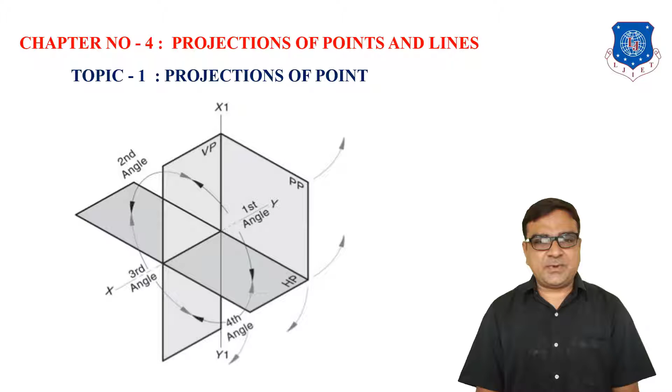When the object is projected on the vertical plane, when you're looking from front, that projection is known as front view. When we observe from top, the projection obtained on horizontal plane is known as top view. And when we observe from any side and the projection of the object is obtained on profile plane, that is known as side view. So we are starting orthographic projections, in particular of a point.

As is shown in figure, this is a quadrant system. We have four quadrants by using two horizontal planes and two vertical planes. When you look at the planes from this arrow, the space which is above HP and in front of VP is known as first quadrant. The space which is behind VP and above HP is second quadrant. The space which is below HP and behind VP, third quadrant. And the space which is below HP and in front of VP is known as fourth quadrant.

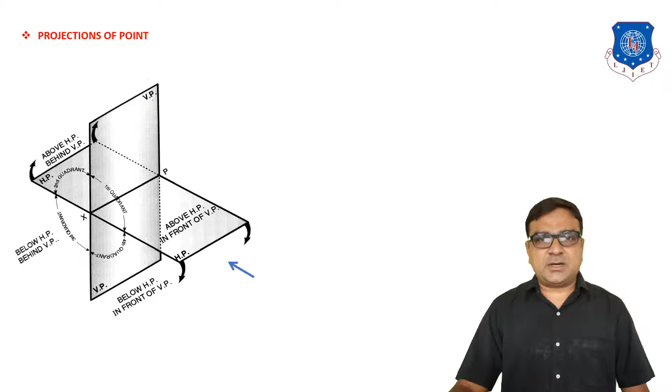Now for taking the projection of point, first of all, we have to select the location of the point. There are 9 possibilities for the point in these 4 quadrants. So let us see location of points. When the point is in first quadrant, its address is above HP and in front of VP. Second quadrant, above HP behind VP; third quadrant, below HP behind VP; fourth quadrant, below HP in front of VP. These are the 4 quadrants where the point is in space.

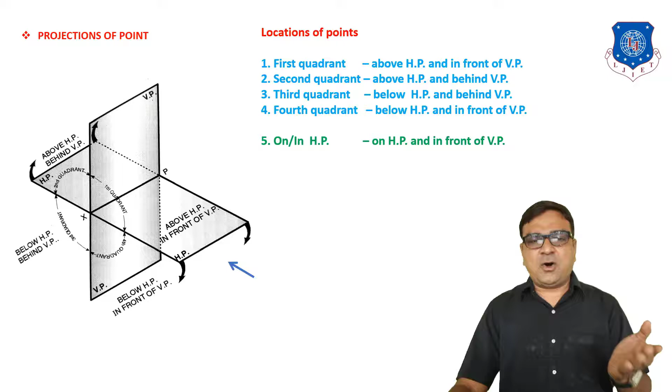But when the point is exactly on horizontal plane, there are 2 possibilities: either in front of VP or behind VP. If the point is on HP and in front of VP, our point is in horizontal plane in front of VP. Second, on HP and behind VP. Third one is on VP above HP, and on VP below HP. So there are another 4 possibilities.

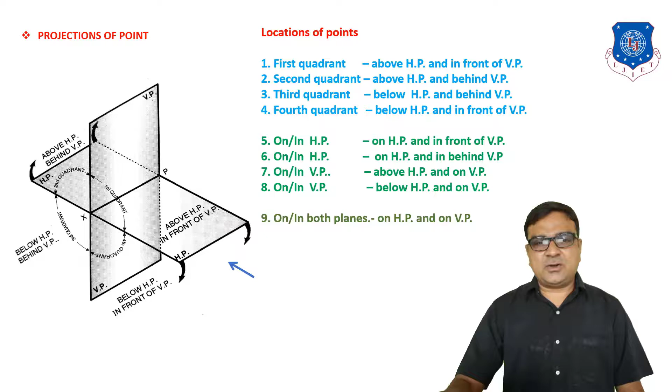And last, when the point is exactly on HP and on VP, the point is on the intersection of horizontal plane and vertical plane. That line is denoted by XY. Now let us see one by one the exact projection of the point when the point is in different locations. Our first case, when point is above HP and in front of VP.

In this object, you can see one horizontal plane and one vertical plane, both intersecting perpendicular to each other, and our point A, which is located in first quadrant, meaning it is above HP and in front of VP. The distance from HP is denoted by small h, and the distance from vertical plane is denoted by V. There are two different locations for the view position of the observer.

When you observe from front, the projection of A obtained on vertical plane is denoted by a dash. This projection line is always perpendicular to vertical plane. And when you're looking from top, the projection of A obtained on horizontal plane is denoted by small a.

After taking the projections, when you rotate the horizontal plane clockwise, you will get the projections which are shown here. This is horizontal plane and vertical plane, with XY between them. The position of VP is as it is, but the horizontal plane, by moving clockwise 90 degrees, looks here like this.

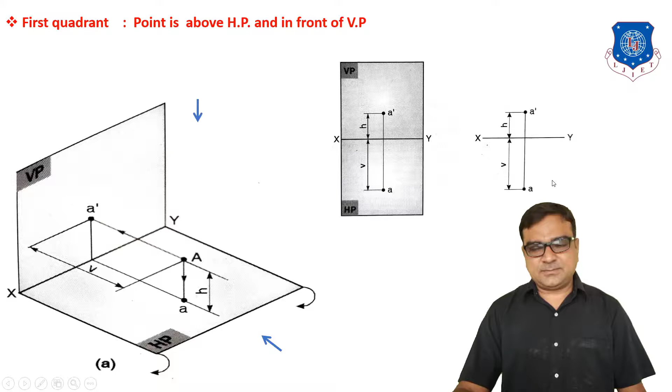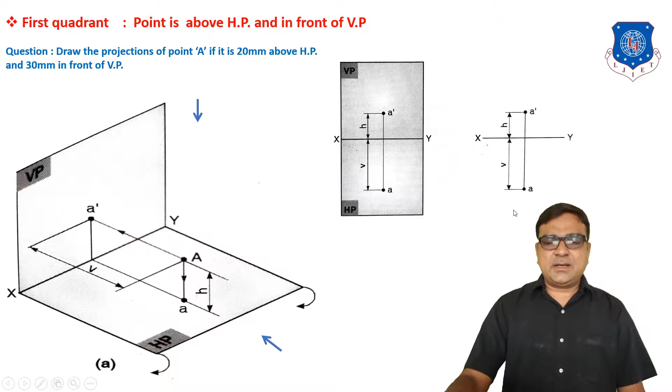Question: draw the projection of point A if it is 20 mm above HP and 30 mm in front of VP. So for this particular question, in our answer, the value of H is equal to 20 mm and the value of V is equal to 30 mm. So similarly, we can observe here the animation of point A: when you're looking from here, the projection of A on the vertical plane is A dash, and from top, the projection of A on the horizontal plane is small a.

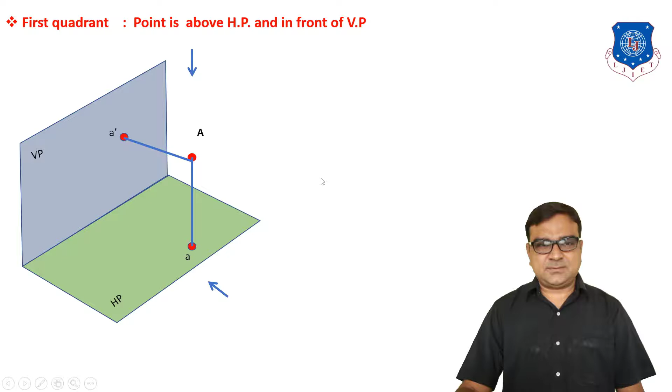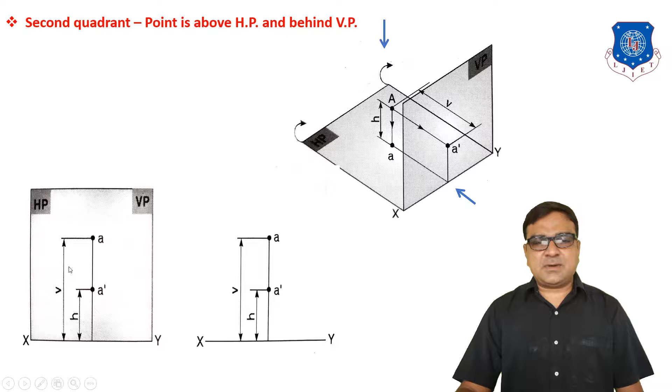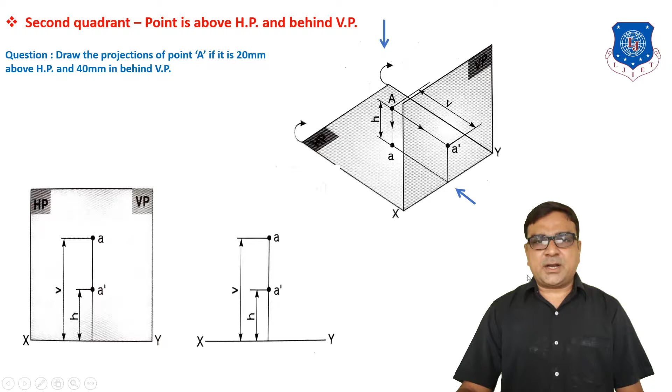Here XY, above XY A dash at H distance and above XY the top view small a at V distance. Generally it is denoted by this drawing. Question: draw the projection of a point when it is 20 mm above HP and 40 mm behind VP. So our answer is here, in which the value of H is 20 mm and the value of V is equal to 40 mm.

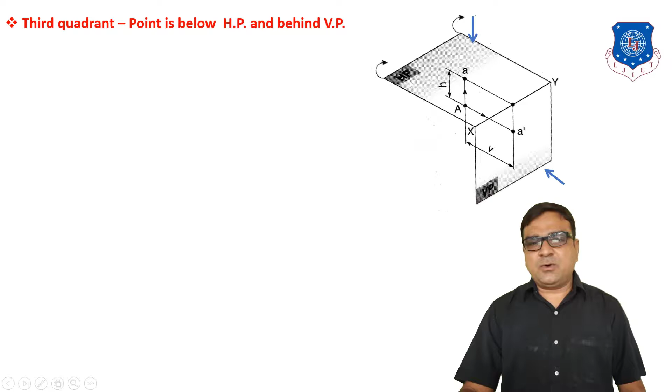Now the third quadrant. So the point is below HP and behind VP. Look at this figure, where our point A is in the third quadrant, meaning below HP and behind VP. When you observe from here, the projection of A on the vertical plane is denoted by A dash, and when you observe from top, the projection of A is denoted by small a. Now to draw in a single plane, we always have to move the horizontal plane clockwise 90 degrees. We do not move the vertical plane. After revolving HP 90 degrees clockwise, our projection looks like this.

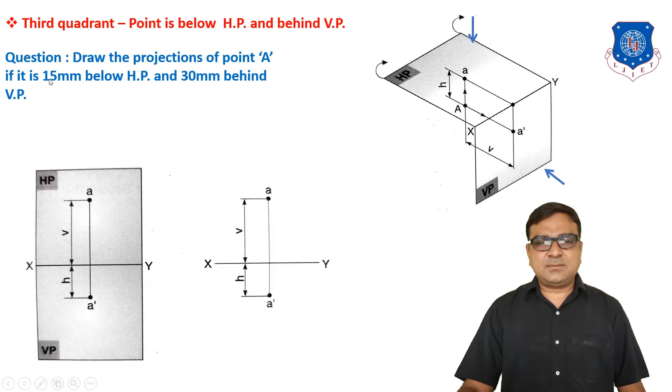XY, A dash is below XY at H distance, and small a, the top view, is above XY at V distance. Generally, it is represented like this. If your question is like this: draw a projection of point A if it is 15 mm below HP and 30 mm behind VP, then the value of small h is 15 mm and the value of V is equal to 30 mm.

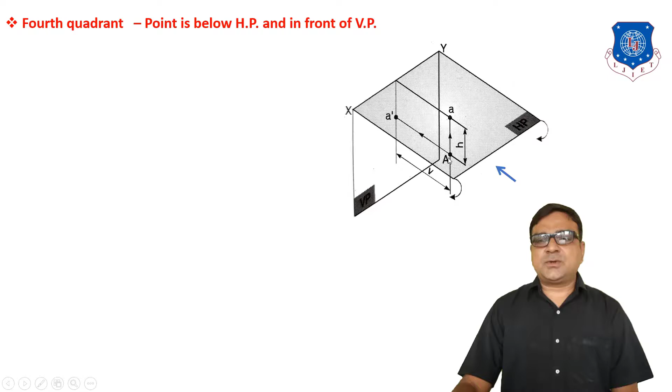Now for the fourth quadrant, the point is below HP and in front of VP. So in the fourth quadrant, the point is projected from front. The projection of A on the vertical plane is A dash, and from top, the projection of A on the horizontal plane is small a. So by moving the horizontal plane clockwise, the projections look like this. Both the views, front and top view, come below XY.

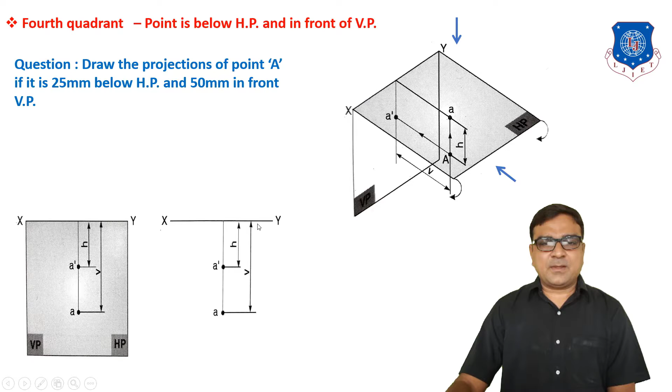And for a particular question: draw the projection of point A if it is 25 mm below HP and 50 mm in front of VP. So its projections in 2D: XY, below XY at H distance A dash, here H is equal to 25 mm, and in front of VP 50 mm, so here the value of V is equal to 50 mm.

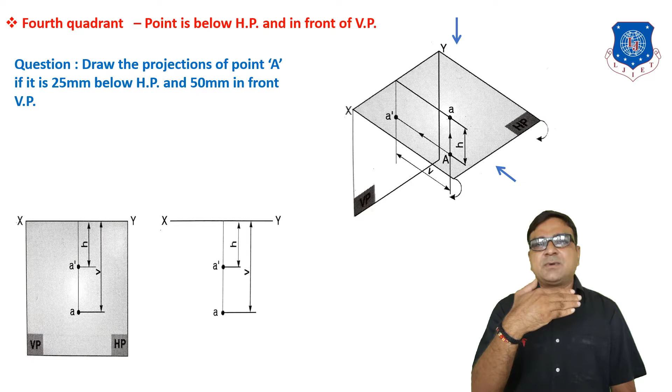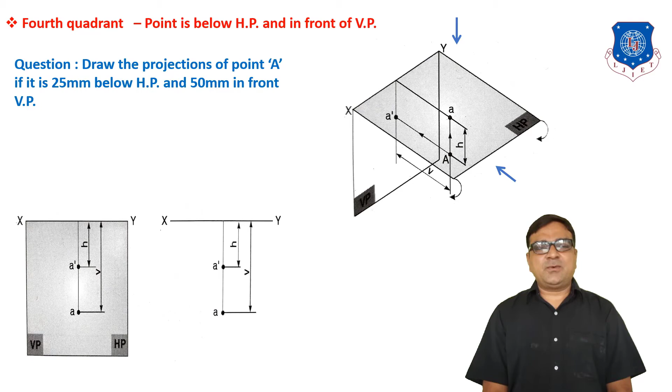So in this lecture, we learned about the projection of a point when the point is located in the first, second, third, and fourth quadrant. The summary of this lecture is: when any point is located in the first quadrant, the front view is always above the XY line and the top view is below the XY line. When the point is in the second quadrant, both views come above the XY line. When the point is in the third quadrant, its front view will be below XY and its top view above XY. And when the point is in the fourth quadrant, both views, front view and top view, are below XY. Okay. So thank you very much for watching this video.